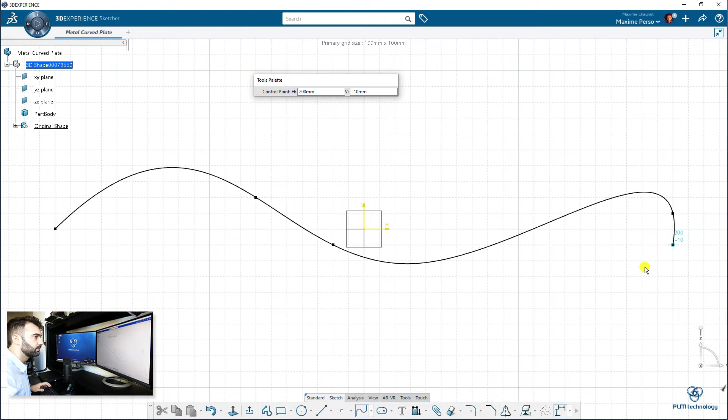So we will just make two curves. Okay, it does not really matter the shape it is, just want to show you. I will make it a bit less curved to be a bit more real. Okay, and I will add another one perpendicular to this one. You see, we can even change a bit the orientation. That should be okay. It's going to be pretty well curved.

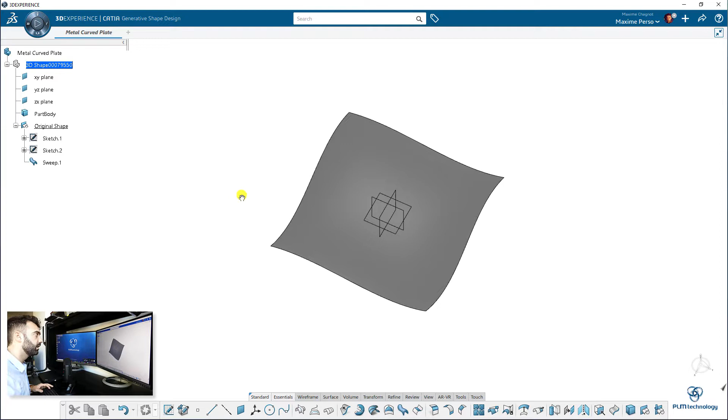You will see when I click on sweep, since I will do a sweep of these two curves. So that's the double curved plate we have, and now I will do a cutout here because I want to have something a bit more curvy than just a 4 edges patch. Okay, I will just open my geometrical set and hide these two sketches because I don't need them anymore, but they are still here, so it's just hidden.

Now I will go on the plane here and I will make the cutout I want. So you see I use the curve feature and I just make a lot of points, and instead of clicking here to close the spline, you right click on the mouse and you select close spline, and now you have a fully curved profile. So it's a bit like a potato shape, but it's perfect for the case we want.

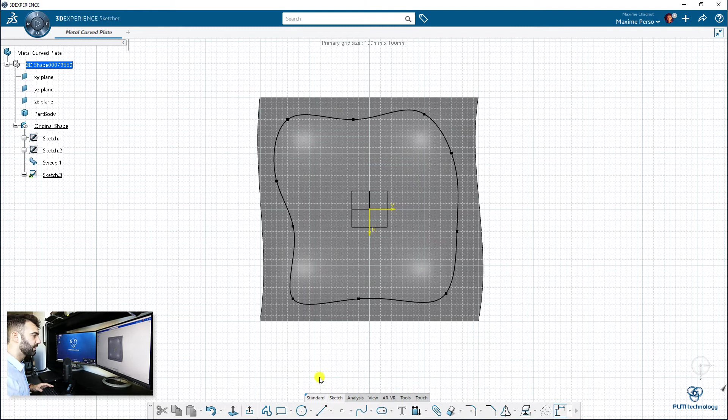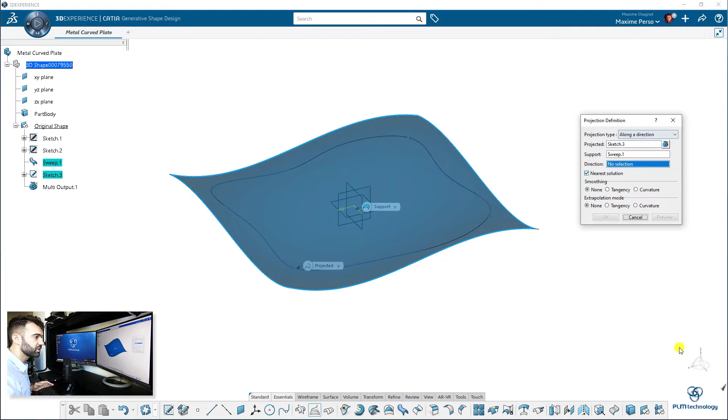I exit that and you see that the sketch is not lying on the surface, and that's normal, we made it on that plane. In order to put it straight to the surface, we need to use the feature projection. So I will project this sketch to my surface, but I will use the option along a direction, and I want to project it along Z. In that case, I'm sure it's perfectly lying on the surface, and I will also remove nearest solution.

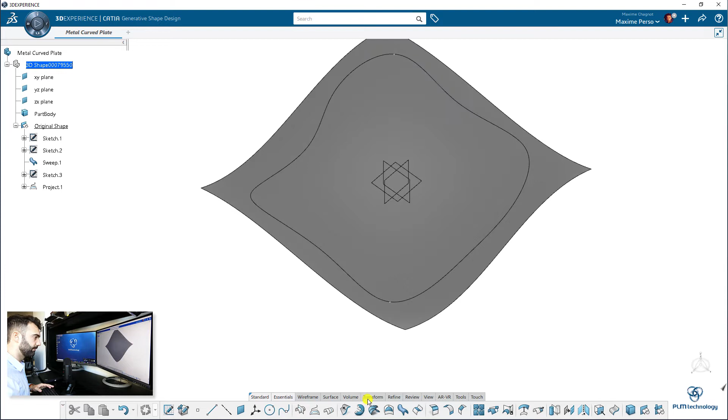I prefer to keep it that way, and now I can hide the original sketch, and you can see here we have a curve on the surface. Now I will split my surface with this projected curve. Okay, and now we have the final plate. Great, now let's move to the second part.

Here I will create a geometrical set here, and that will be the original area for my cutout, and later we will do several cutouts on the edge. So I will just call it original cutout. Okay, so as you can see now it's underlined, so I'm working on that geometrical set. I will also hide this projection here, that is the boundary of the patch here.

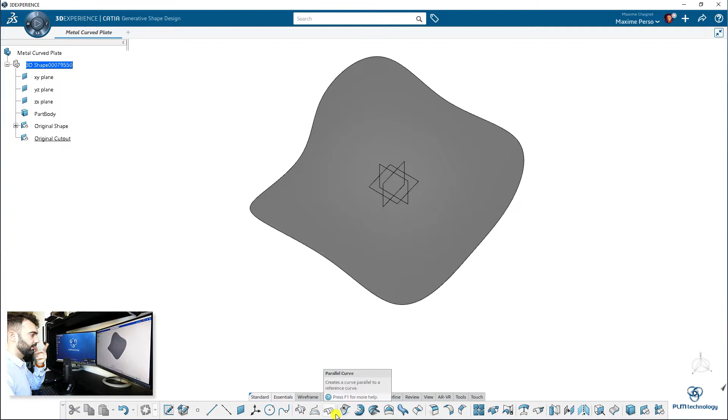Okay, and now let's first create a parallel curve because I don't want my cutout to be on the edge. I want it to be a bit before. So let's put 10 millimeter. So what I do here is I select the option parallel curve and I select the boundary of my patch here and I put 10 millimeter, and you see it's on the support here.

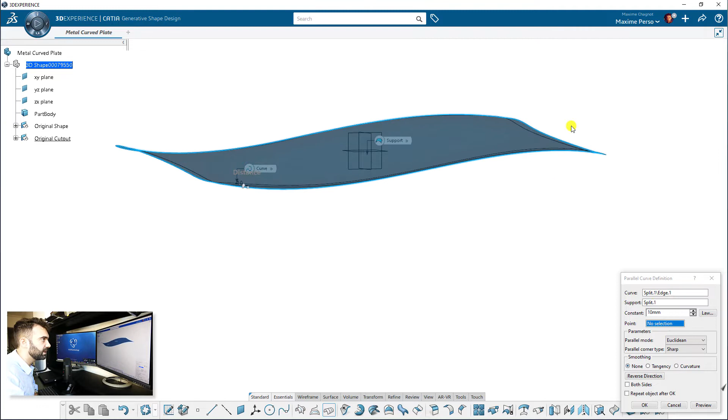So meaning it's lying on the surface, and that's a good thing. You can of course modify this value. You can put 15, 20, etc. Of course, if you put it too high, you will have a problem at the center here.

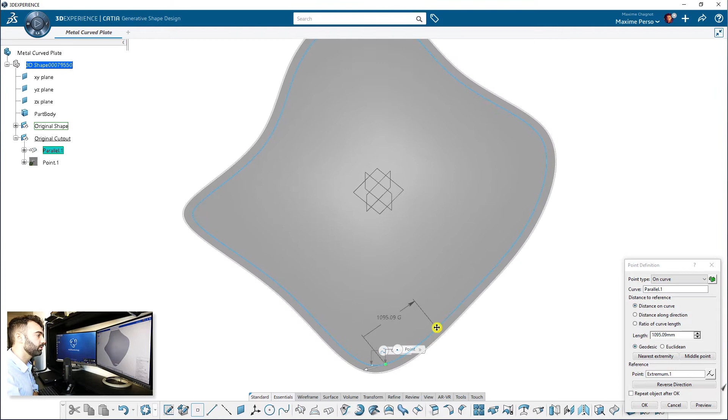Okay, and now I want to make a point. But if I select the point option on this curve, the software will just bring me a point in the curve. And if you see, if I put 0, it's going to be this one. It's not really what I want. I want to have a point maybe in that area. So I will use intersection.

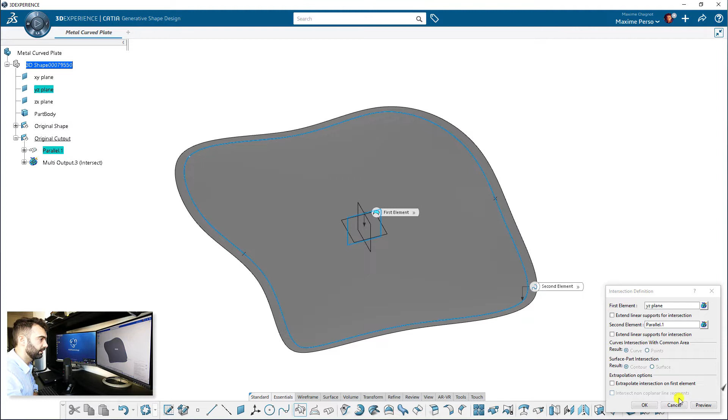I will intersect this plane with this curve here. And as you can see, you will have two results. You will have a point here and a point here. So when I click on OK, the software will say that you will have two results, and you would like to select the option keep only one sub-element using extract.

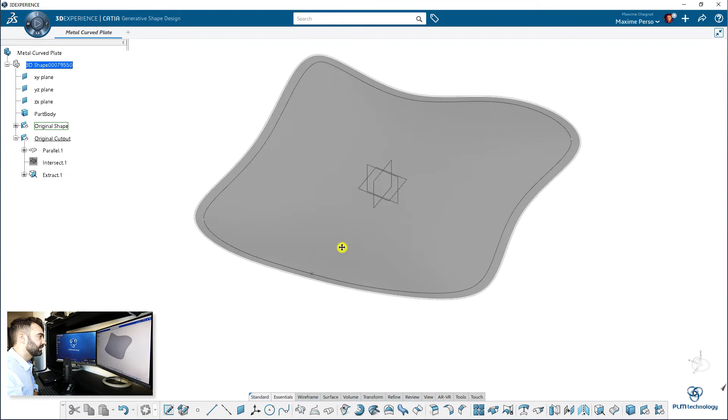When I click on OK, you have the extract feature that appears, and you will select this one there. Okay, the software finds it, click on OK, and now you have an extract. Okay, next step, we are going to make an axis system on that point lying on the surface. But before creating that, I will make a plane tangent to this surface passing through this point. And as you can see, the software automatically finds it.

I click on OK, and I will also make two lines. The first one is going to be tangent to curve. Okay, so this curve passing through this point, and you see 20 millimeter in that way. Great, you see it's lying here. And I will make another one, and this one is a bit more complex. It's angle normal to curve.

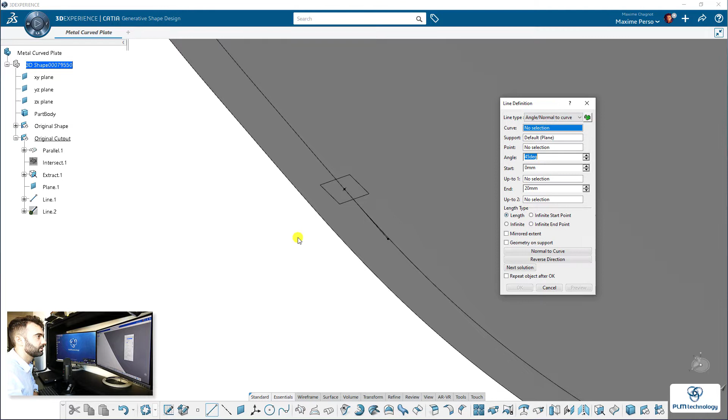So basically what I want to do here is I want to select this curve passing through this, well, the support is going to be the plane. Okay, and the point here. And now I don't want 45 degrees, but I want 90 degrees, preview, and except that you want it in the other direction, so I select reverse direction there.

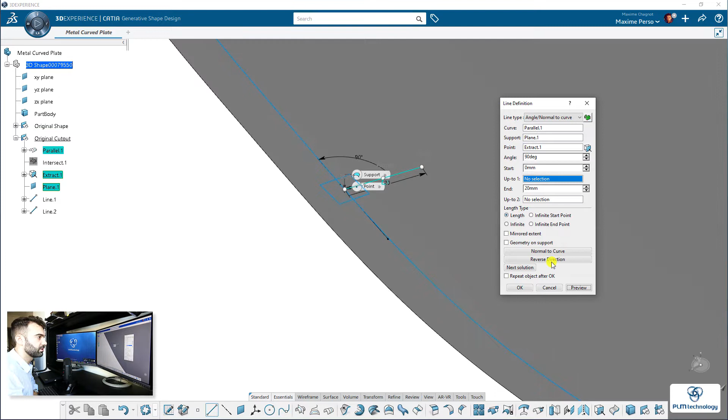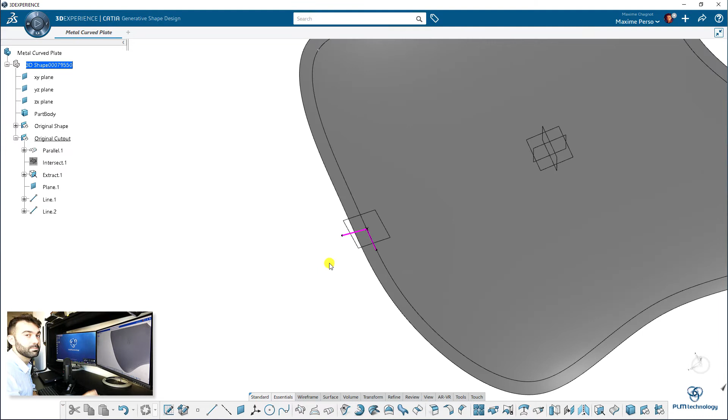Okay, so if you don't really see them, properties, I can put some color here. Okay, pink, and of course you can make it a bit thicker, but it's just for you to see. So you see, basically, I've made an axis system manually, okay? But it's just for the axis system feature here to find it easier.

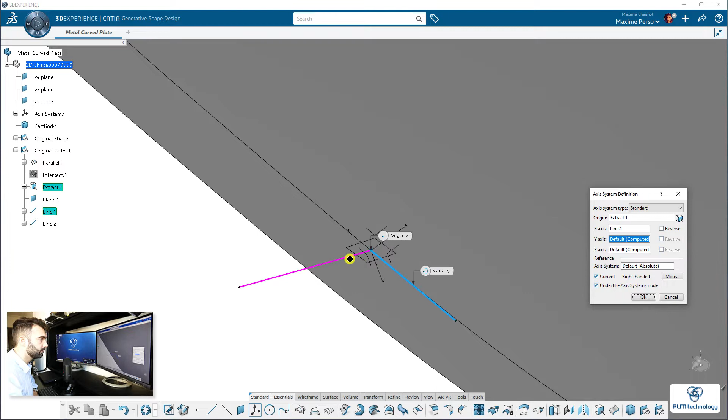So now I click on axis system, and you are going to say that you want to have an axis system on this origin there, okay? And the X could be this one, and the Y could be this one, okay? And now you can play with the reverse feature if you want, but in that case it does not really matter, because the software understands what you want. Okay, so at least we can make it that way. Great. Now I click on OK, and you can see that I have an axis system here.

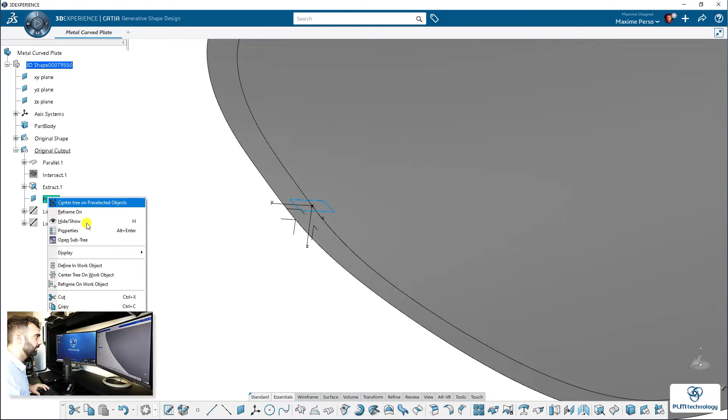I will just hide these two lines since we don't need them anymore. Actually, I'm going to just hide the cutout. No, wait, I need just to hide these two here. Yeah. Yes, and I also hide this plane. We still want the extract there.

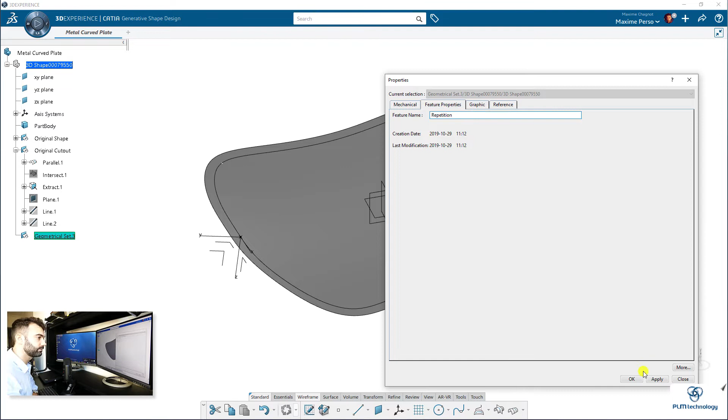Okay, now next step. We are going to make several of this axis system on the curve. So I go to Wireframe, and I can even create another geometrical set which we'll call repetition. Okay, so now you see it's underlined. I'm working on that geometrical set, and I will select the option points and planes repetition.

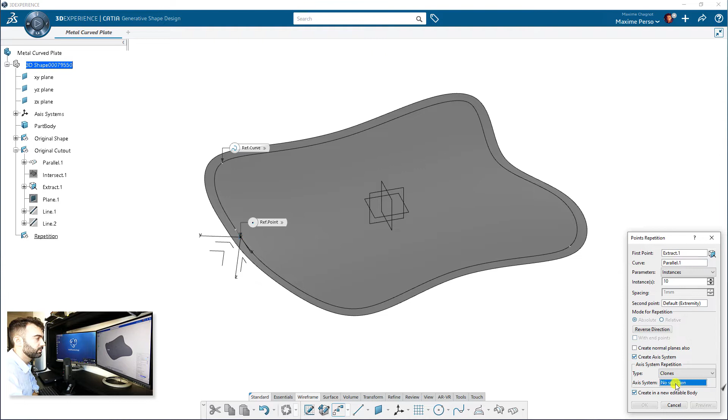What does it ask you? The first point is my extract. Then the curve is this one, okay, and then it asks you the instances. Let's start with 10. Okay, and very important here, you can select create axis system, and of course you select this one as the axis system you want.

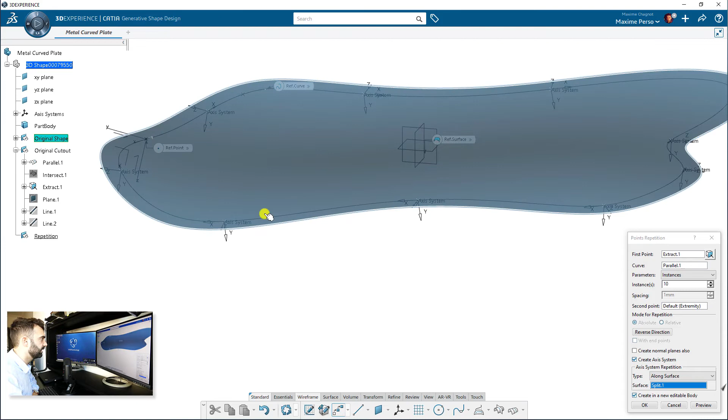And you select the option along surface. Yes, here it is. And now all the axis systems are lying on the surface you created. I think it's pretty consistent here. We see all the Y are down. Well, it does not really matter because the only thing we want is just to have this line here.

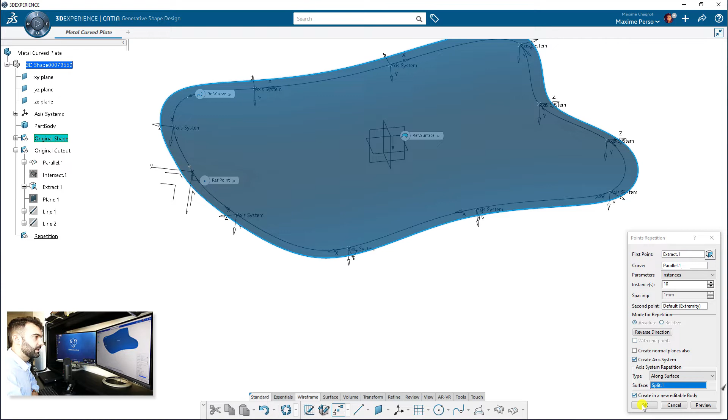Okay, now we click on OK. So as you can see, we have 10 axis systems. That's great. You can find all of them there. And now we will do the step of the cutout. So I will make a power copy in that case. Okay, we can already save this and we will come back to it later.

Okay, I create a new part that I will call master power copy cutout. Click on OK. And now we'll make the power copy. So that's the second step of the video. Still in Generative Shape Design, I will make a geometrical set. I can even call it cutout.

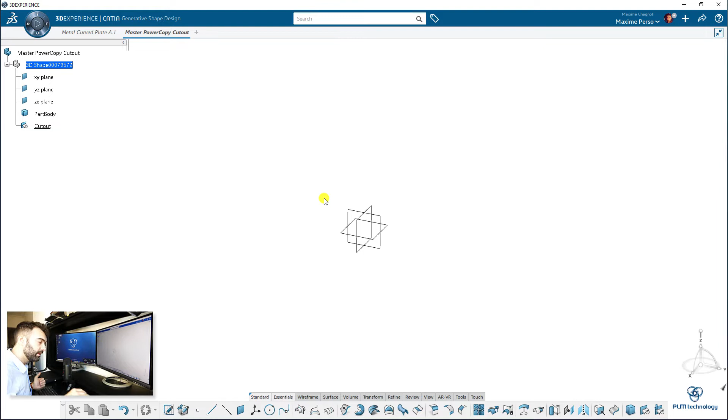And now we make the power copy. And very important in the power copy, you should not reuse these three planes. You should make your own plane with your own axis system. So what we will do, I make a plane based on this one, but it does not really matter. I put 0 millimeter. I will hide these three planes now. Okay, so you see there is only this one, plane 1.

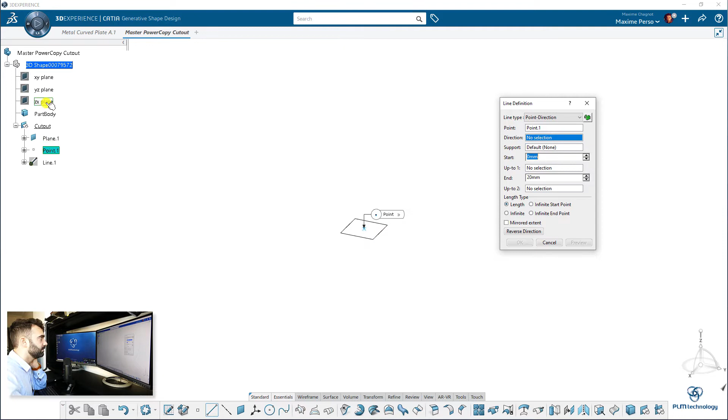Now I will make a point. We know that this point should be 0, 0, 0. Okay, and I will make a line. So you want to make this, I think it's going to be point direction. Okay, so you want to have this point here, and direction is not going to be this one because this one is going to be normal. So we'll just select this one. Okay, or if you prefer, this one.

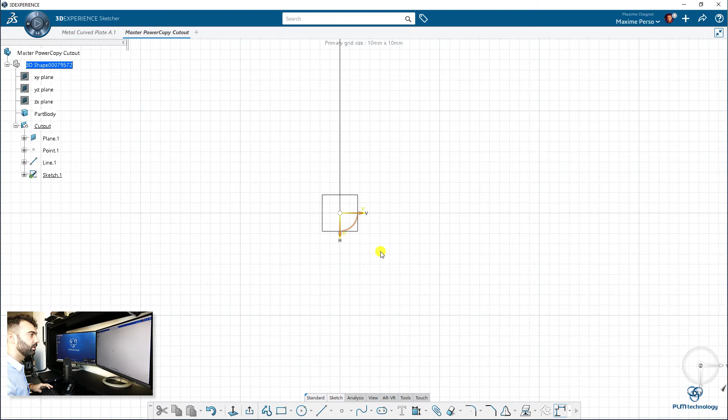Okay, reverse direction. Okay, so now we know that we have a plane, a point, and a line, and that's what we will need later for our power copy. Let's make a sketch now based on this plane here, and we are going to make the shape of our cutout. But be careful, you don't want to use H or V. So, for example, if you make a line here, you don't want to have a V here. In that case it's vertical, but you see it's because I should have made my line in that direction.

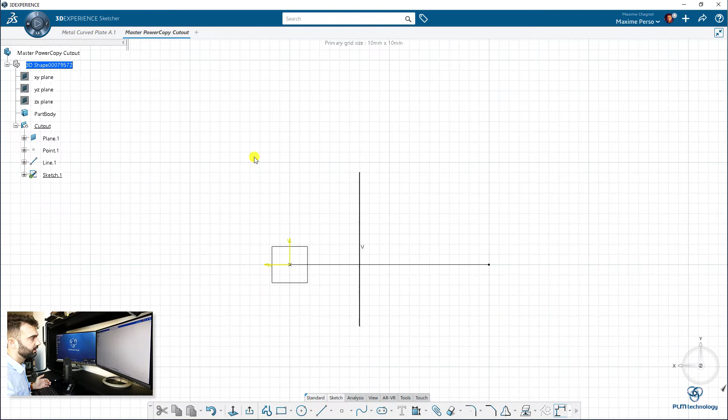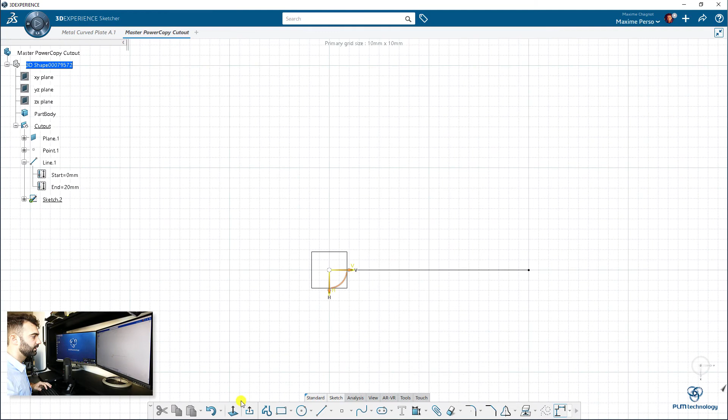So if you want to get rid of that, we can delete that. I delete the sketch, and now my line here, I will not select this one, but I will select this one. Okay, well, it does not really change that much. I go back to my sketch here, and what I said is this line, you don't want to be horizontal here. I click on delete, meaning that it can be that direction. That's not good. You are going to make a constraint manually here. So you will select this line and this line here, and you will put 90 degrees. Also, you will select this line and the point we created here to make a coincidence.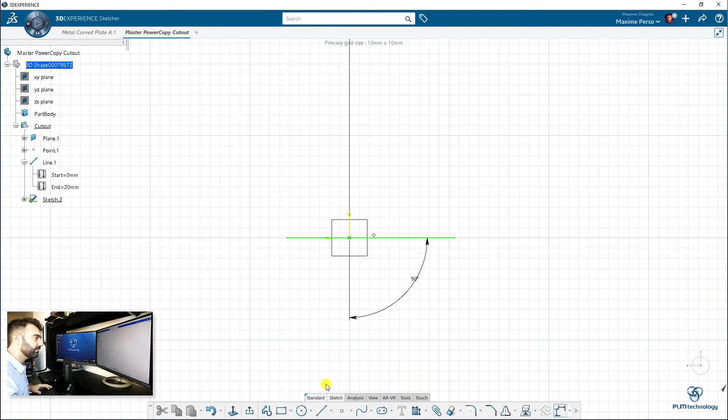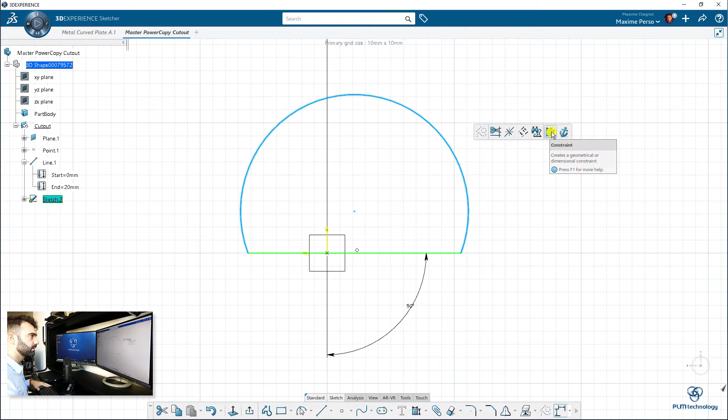And now it's a bit up to you to decide the shape you want. Let's make something rather complex, but everything needs to be constrained. So let's make maybe an arc. Okay, so that could be the shape. So you say you want the radius and you want this point to be connected to this line there, coincidence. And we could also make something a bit more complex, maybe to show the real advantage of that tool. Let me see.

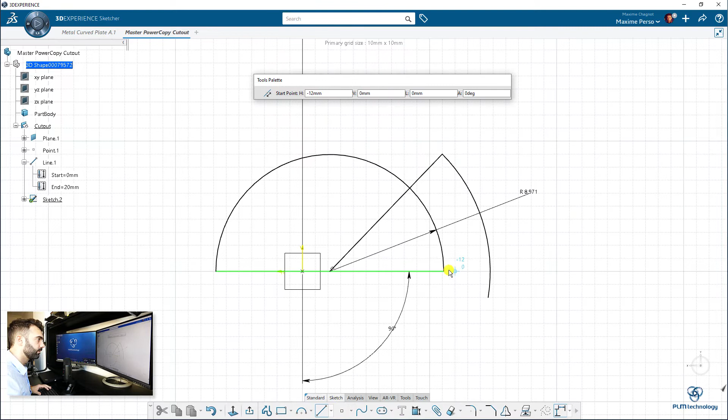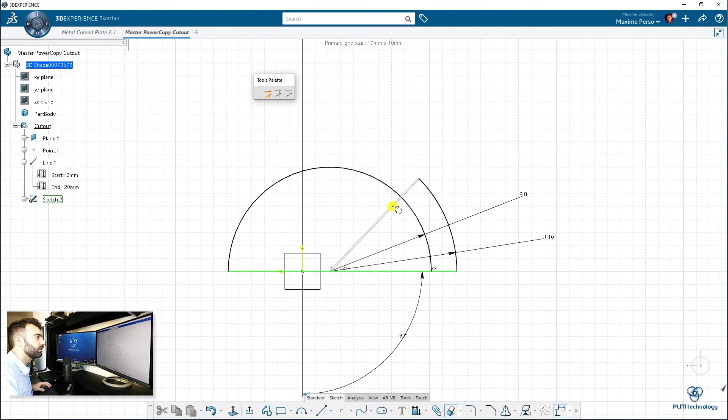Okay, so what I'm doing here is I will trim that here. Okay, so that could be the shape we have. So this one is 8 millimeter, this one is 10, for example. So it takes a bit more time to do it since you don't use the horizontal tool, but you will understand. So that could be the shape of our cutout. Very important, you need to constrain everything.

So what do we need here? We need an angle there. Okay, 45 degrees, for example. We have the radius here. Okay, so what we need now is that this center here, the center of our arc, is coincident to that line. And now it's fully constrained. Am I right?

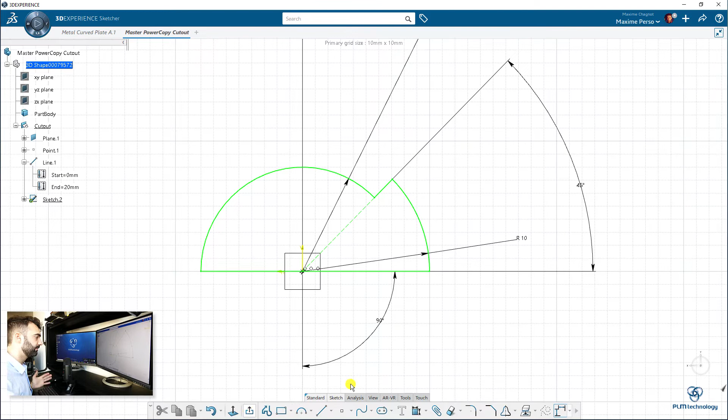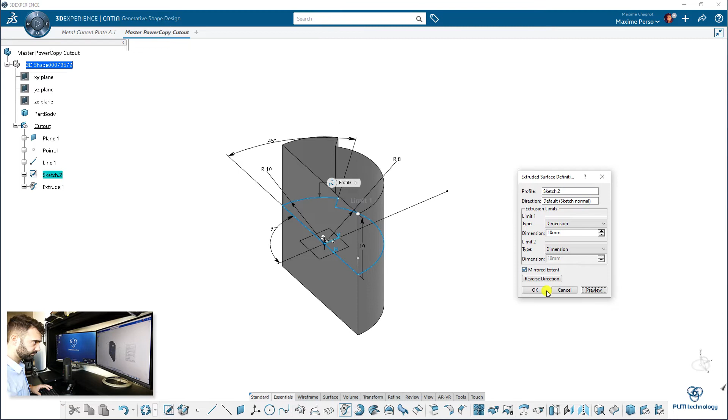Another thing, you need that this line and this line here, I will put it as a construction element, are passing through the center of the radius, and I will select tangency. Okay, great. So now we have the cutout we want to do for our plate. I exit. It's a bit complex, okay? And I will now make an extrude. And I will say both directions, mirrored extent, 20 is a bit too big, so 10 millimeters should be enough. Okay, so that's the shape of our cutout. And you can also hide the sketch because we will reuse it in our design, so we don't want to have the sketch always shown.

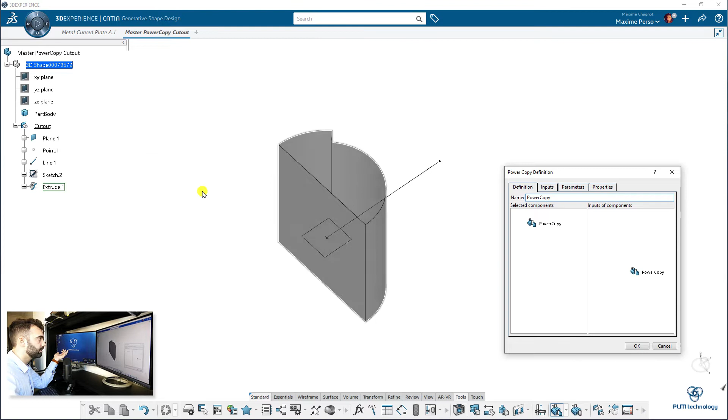Okay, now what do we do for the power copy? You will go to the Tools tab, and you click on Power Copy. You see the panel is here, and you select Extrude, that's the feature we want, and here it says, if you select the extrude, you will need a sketch as an input, but we don't want to make the sketch, obviously, so we select the sketch as well, and now it says, you will need a plane, a line, and a point, and that's what we want. You can also rename it Power Copy Cutout.

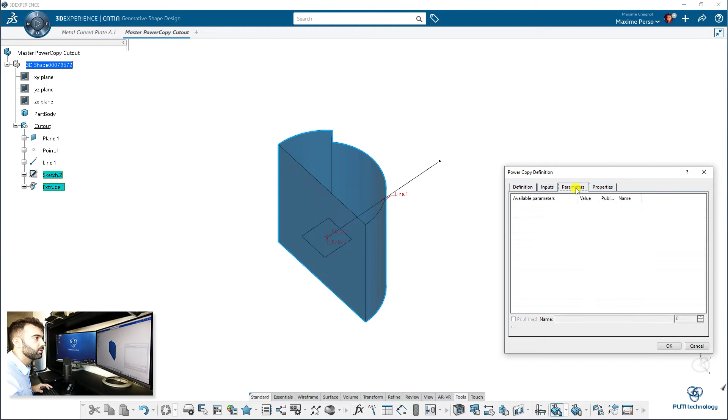If you want later, you can also add some parameters in that power copy. You can see you could add, for example, the radius, 8 and 10. Well, in that case, it's not very important. I will not change it in the video, but that could be possible. Okay, I click on okay, and now it creates this power copy here. The power copy is only in this part, so you will have to save this one. But if you want to find it later in the 3DExperience, you can also select save in the.

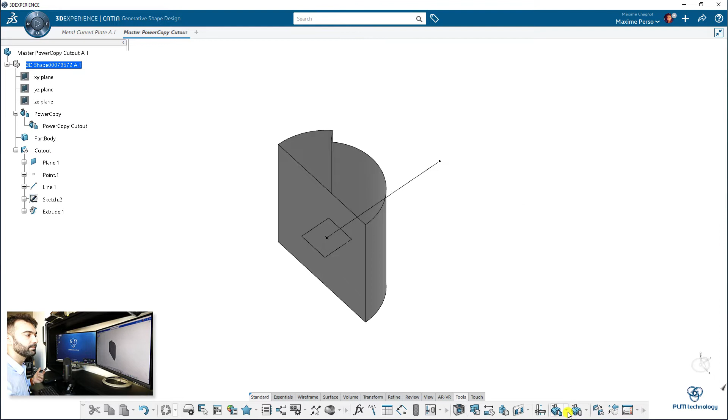You can also save it in the catalog. Okay, now we go back to the metal curved plate. We are in repetition now, and I will instantiate my power copy. How to do that? You will still be in Tool, and this time you select Instantiate from Selection, and you go to the master power copy, and you select it.

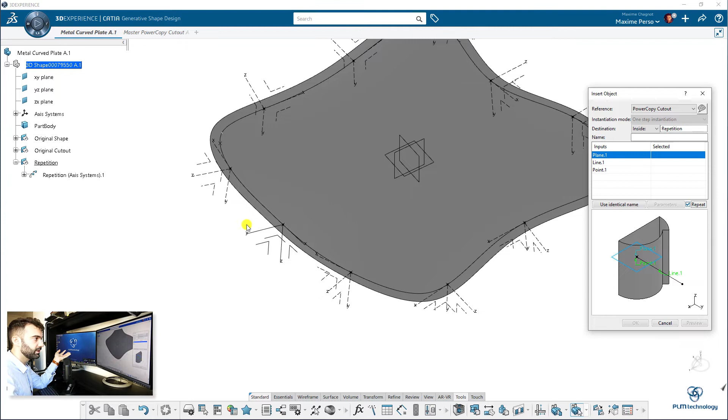Now we are back to the part, and we have this panel that appears here, and it says that we need to select a plane, a line, and a point to create this power copy, and this is what we have. Another thing that is pretty nice is you have this small repeat function here that allows you to do it several times in a row. Okay, let's start with the original one. As you can see, maybe it's not easy to see, but these ones are dashed.

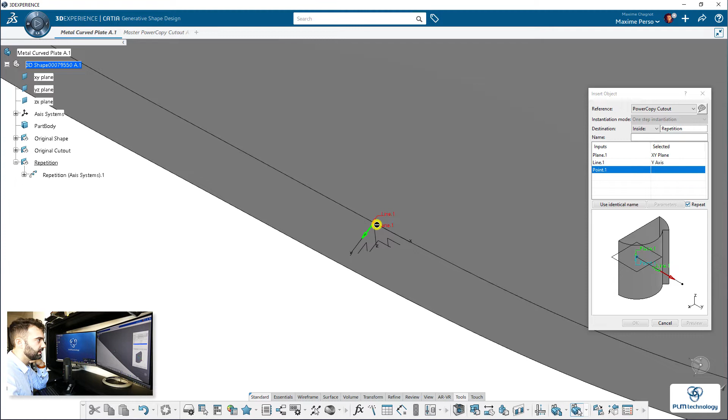Okay, we select the plane. So the plane is this one here. Now you select the line. The line should be this one here, and the point is the tiny point here. Click on preview, and if it's not the direction you want, you can click on the line here and select that. And now you have it on the other side.

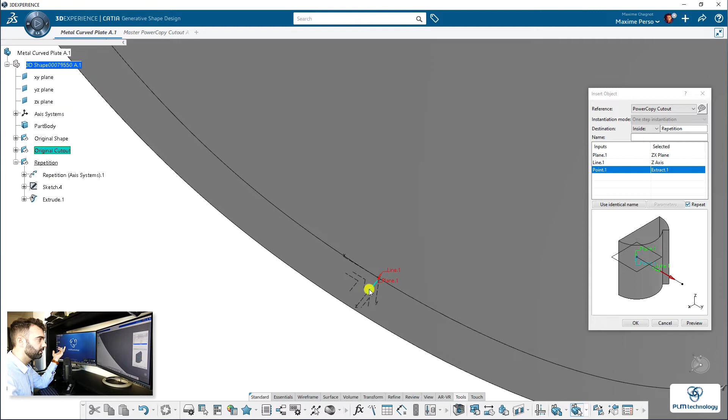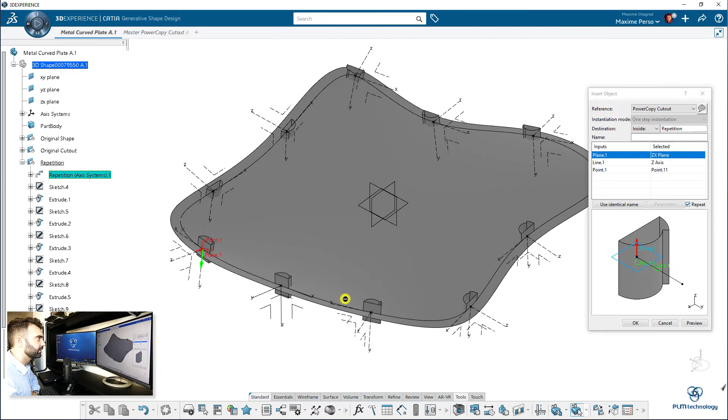Click on OK, and this is still a bit repetitive, but it's really fast to do it. So I select the other plane, the line. Now I know it's in the other direction, and I select the point. Click on OK, and I continue that way. Okay. And we have done all of them now. So I click on cancel, and now I'm stopping here. So we have done the cutout now with the power copy.

Let's create a sheet metal part. So now I go to the part body here, and I switch to sheet metal. The first thing you need to do in sheet metal is to set up the parameters of your plate. Here it's going to be a thickness of 2 mm with a bend radius of 4. I click on OK. And if I go straight to this feature, freeform to surface, you will see we'll have some issue because it will need a line to tear to make the plate flat.

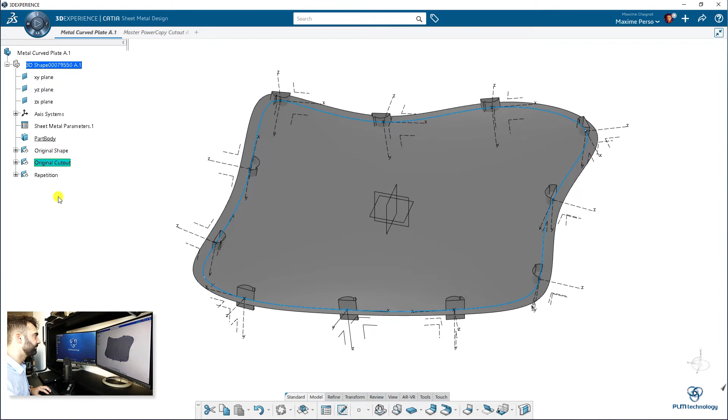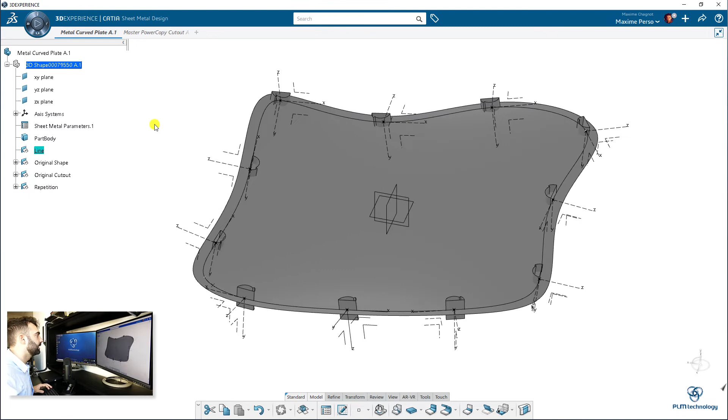So let me show you here. I select this feature, freeform to surface, select the surface, okay. Select a reference wire. We don't have any, so we'll have to make one. So I've been a bit too fast. I create another geometrical set. Line, okay, and I switch to Generative Shape Design. If it's too much for you to see, I will just hide this, okay.

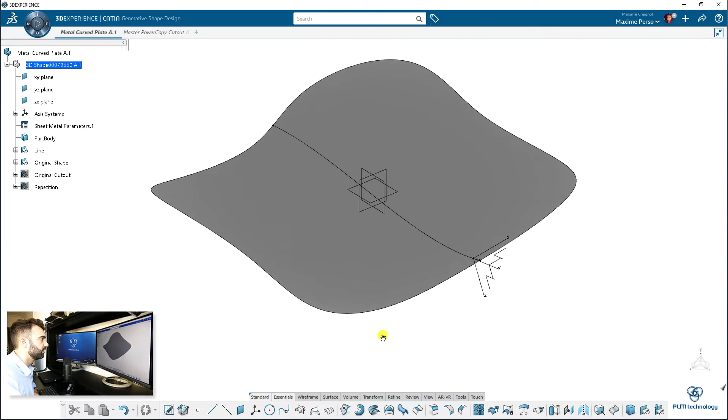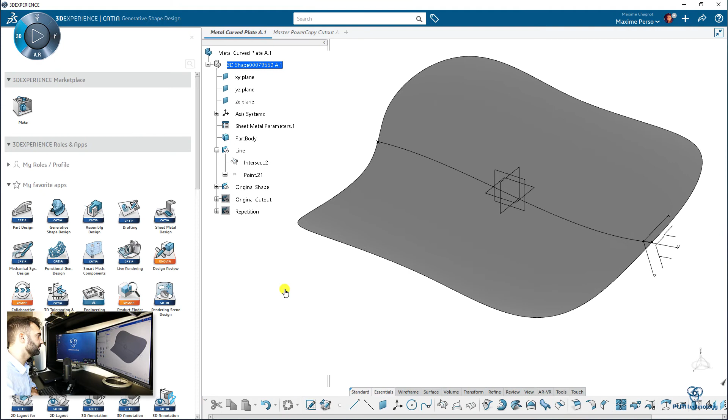What do I want to do? This line, I'm going to make an intersection of this surface and this plane. Okay, great. It's perfect for me. And now it will also ask for a point, so we can even say 0 here, ratio 0. And there you have the point. Okay, so now I switch back to the sheet metal application, great, and I can select my freeform surface.

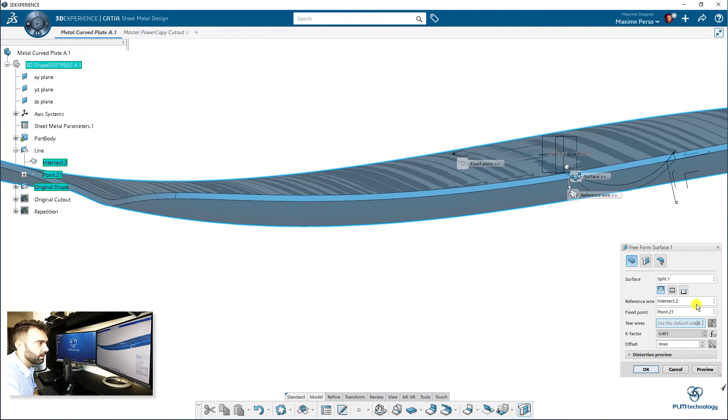The surface is this one, the reference wire is this one, and the fixed point is this one. Preview. It takes a bit of time, sure, but now, as you can see, it's becoming a solid, okay? And you even have some options if you want to have it on top or on the neutral. Let's say neutral is a bit better. Here, as you can see, it's passing in the middle. Okay, we can hide this line, we don't need it anymore.

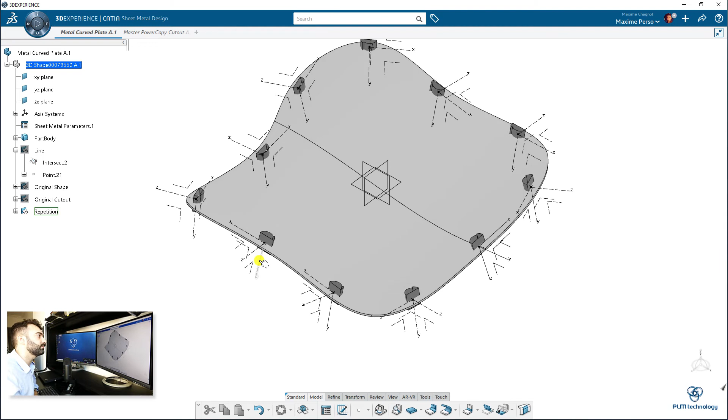And good thing, if I click on unfold, now you can see that's the plate, so you can make a drawing directly because now it's flat. Okay, I will show it again. So we don't need the original shape, but we can have the cutout, the repetition there. So what do we need to do now? We can select the refine tab. You select the option cutout, and when you double-click, it will select in a row.

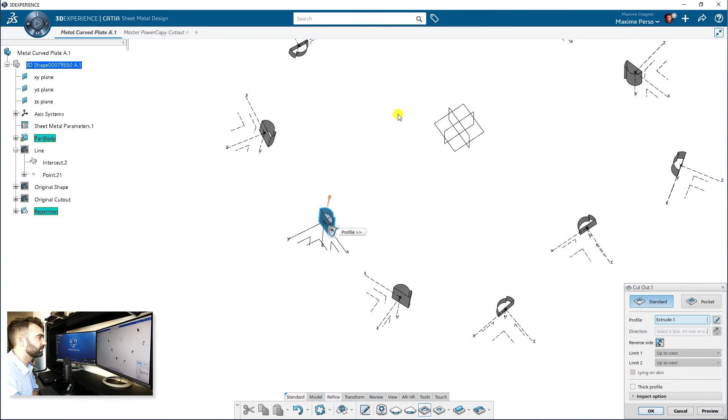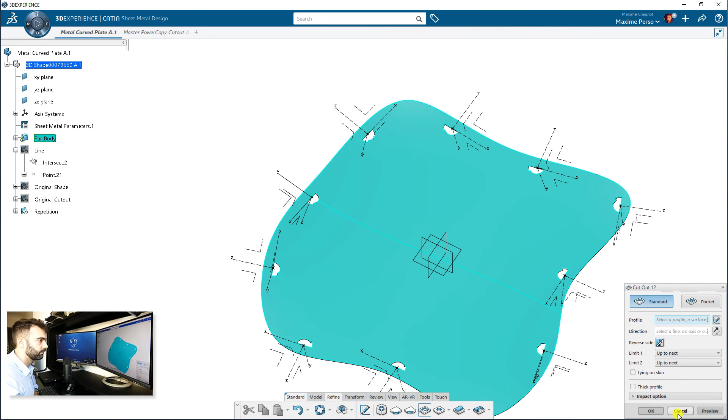So let's start with the first one. The first one is this one, and be careful, because if I click on preview now, it will remove the outside. So you need to change the arrow to the inside of the cutout. You click on OK, and we do the same with the others. And here I'm done. Okay, so I can even hide this, and I can also hide this one.

Okay, and if I click on unfold, as you can see here, we have all the cutouts we want on this flat surface. You can even make a drawing directly, and if you want, send it to a machine that can punch all these holes.

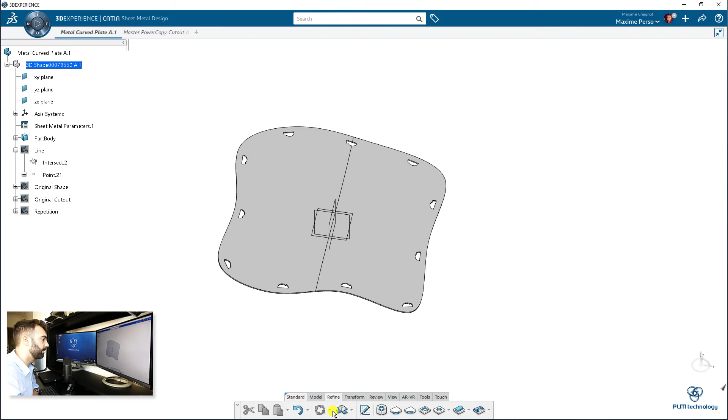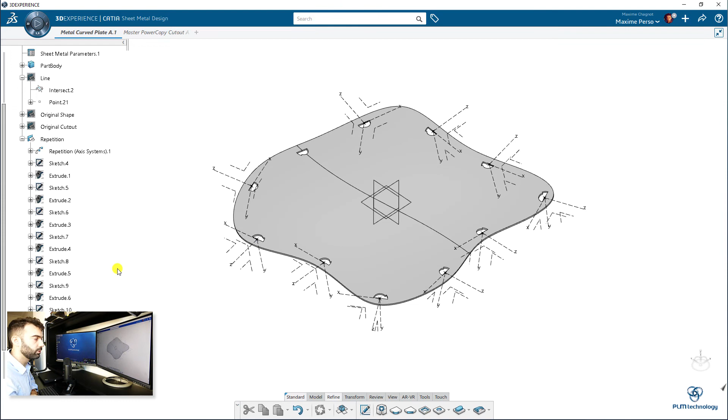Of course, in that case, it's still a bit manual, but there is still some robustness in that assembly, because now if I modify the number of repetitions, some of it will follow. Let me explain. If we say that we want 12 instances, it will work in that case.

Okay, so what does it do here? It's maybe not easy for you to see because all of them are hidden now, but we still have the 10 cutouts we did, and now we have 2 extra.

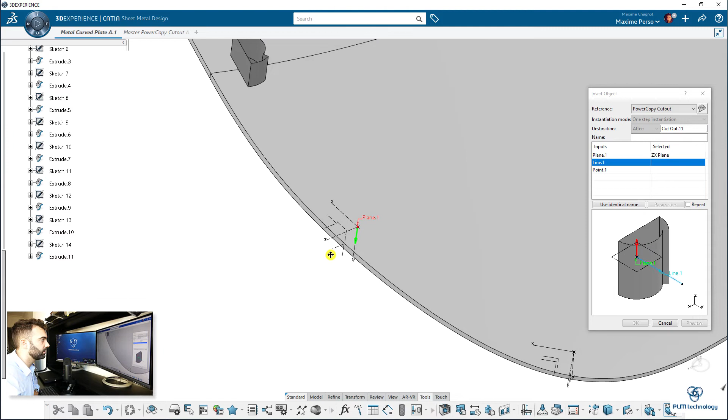So if you want to make 2 more, we go back to the power copy, and we select this one there. I select my power copy, and we can add 2 extra. So I will select member, the plane, the point, the line, and the point, and click on repeat. Okay.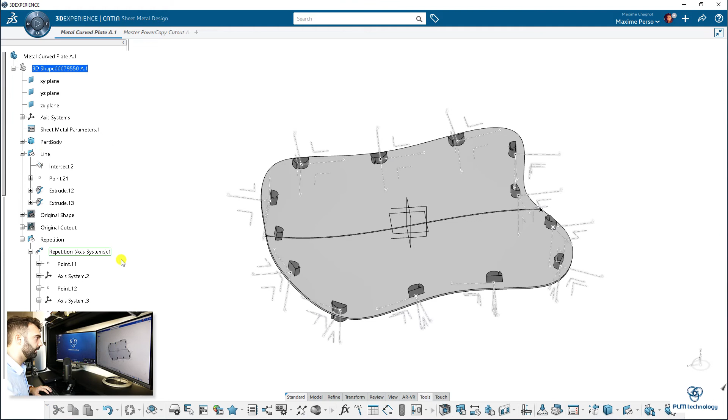I know what I've done. My mistake was that I was not working in the repetition geometrical set. I was working on line. No problem with that. What you can do is just select this one, extrude, and change geometrical set. You put it into repetition, last position, okay, and same for this one. Change geometrical set and repetition. Last position. Okay.

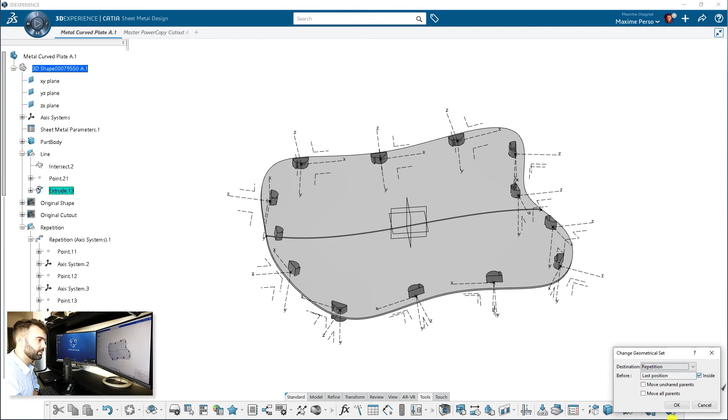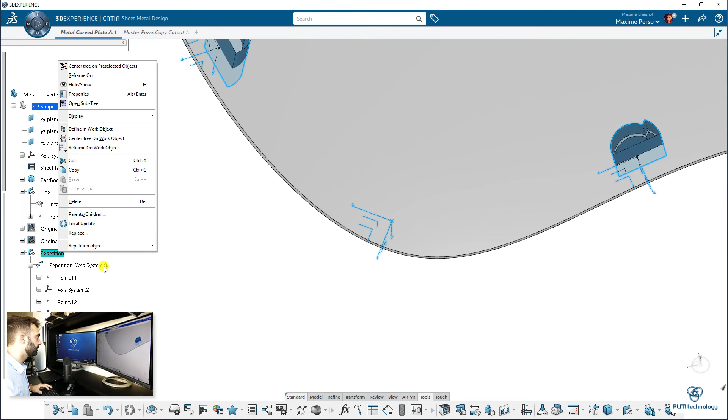Actually, this one I can delete since it's in the other direction. I will instantiate it again. So I want to be sure I'm working on repetition, defining work object. Okay, and now I will search it, power copy, and plane, line, change the direction, and point.

Okay, here it is. So we have added them manually, but we can just go back to our sheet metal. So you see the sketches are here. Well, it's not a big issue. I will use the cutout feature in refine. I will show this, and I will do a cutout of this one and a cutout of this one.

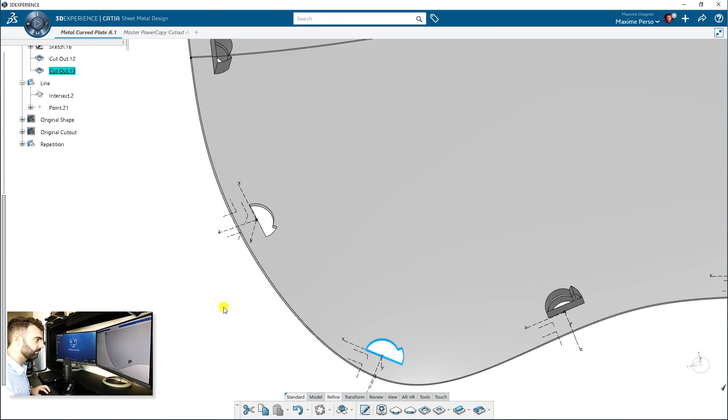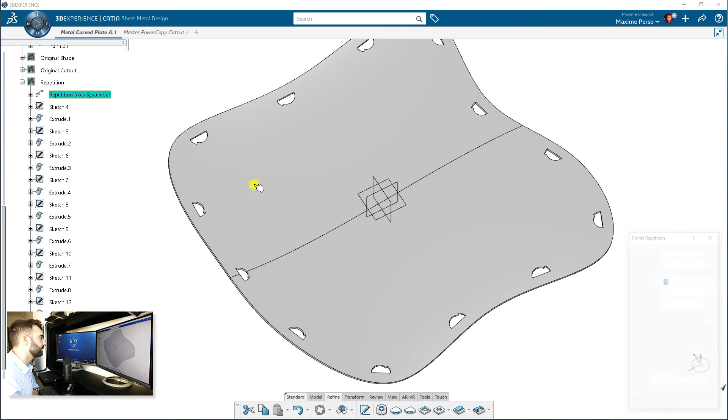Okay, and now again, what if we go back to what we have done? So here we basically reused the feature to do 2 more holes, but what if we reduce to 8 holes, for example? It will work, but then it will say that you have 4 extra cutouts. So I put 8, yes. Okay, it said that you have an issue, it's no problem. And we are going to update.

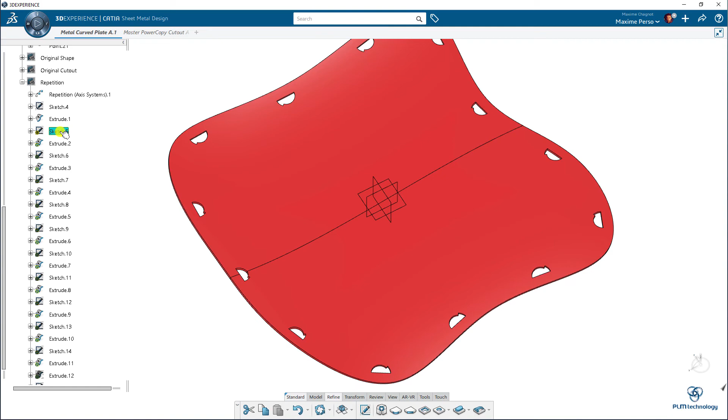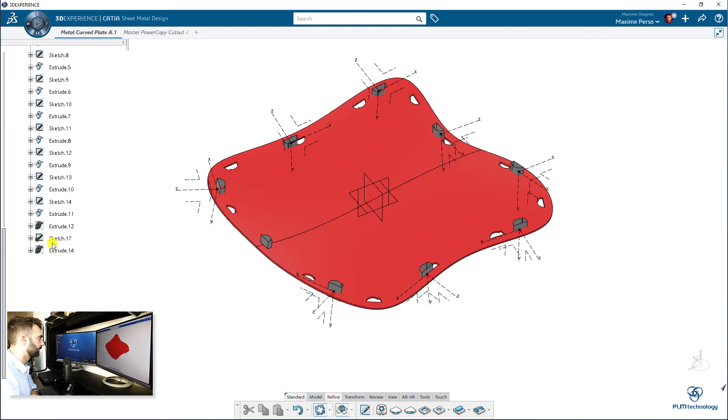And here it said that this one you want to delete. So I will hide. Okay. And this one delete. Okay, and the 2 last ones we created, delete as well, and delete. Okay, and now we are good, except that the sketch, we don't need it anymore, and this sketch as well.

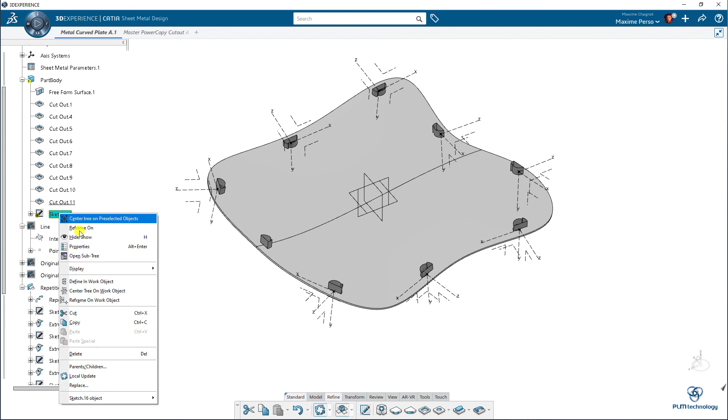Okay, and now, oops, I will just hide this one there. Here it is, and I can still unflatten it. So this video was to show you that Power Copy is a great tool in that when you have this complex task to do, it can be really nice to use it to make your own feature, more or less. And you can just select several inputs. So there is a bit of manual work in that, but there is still some robustness in it, since you can very simply click and place the cutout you have.

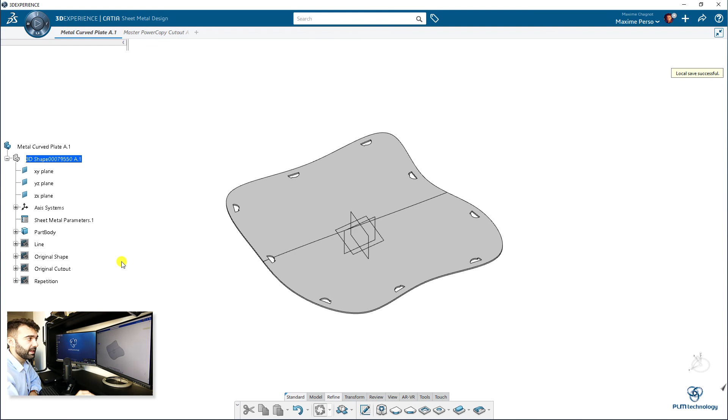As you can see in my other videos on YouTube, I have done several examples of Power Copy. I did it with a tube, and I did it with a profile according to a line. In this case, it's a combination of a sketch and a generative shape feature, but as you can see, I could use that power copy in sheet metal directly. And the good thing here is I know that my cutout is perfectly perpendicular to my shape, and when I unflatten the model, it will follow. If you have, for example, a punching machine that has this tool, it will follow all the curve.

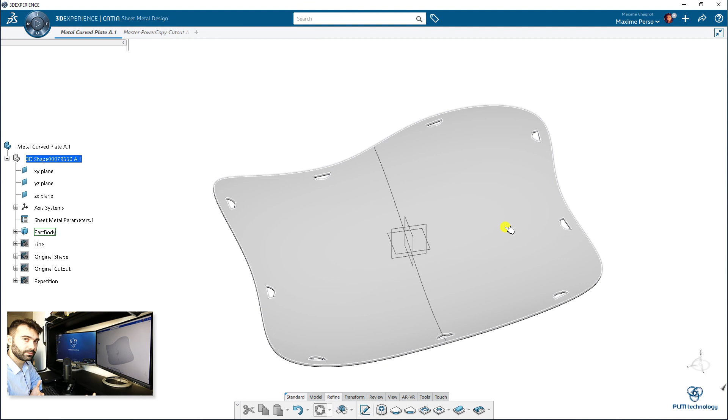And it took a bit less than 30 minutes. Actually, it took 20 minutes to do the plate with the number of holes. So it shows you that it's kind of fast to use. And another good thing is every time you have to do this kind of cutout, now you have it saved in the 3DExperience since it's a power copy. I have a customer that does it a lot. He has this cutout in all these plates, and he can just reuse it every time, and everyone in the company can reuse it. So it's a real time saver in CATIA 3DExperience.